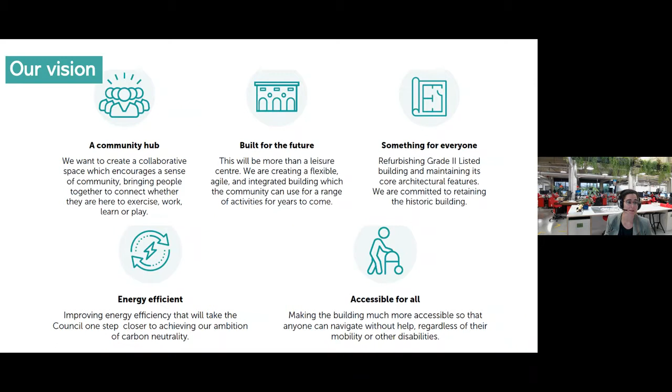In terms of the design principles for the building, we're looking to reconfigure all the existing spaces to make better use of the spaces and to be able to put new uses into the building. We want to create flexible spaces within the building, which the community can use for a wide range of uses, as well as consolidating the Marylebone Library into the building within a new family hub, as well as retaining and hugely improving and enhancing the existing leisure and changing facilities which are in the building. Next slide, please.

We've carried out a number of engagement sessions through webinars such as this in the past, and we also undertook a public survey, which was very useful, and we've been looking into the feedback from the survey and incorporating those where we can into the design of the building as it moves forward.

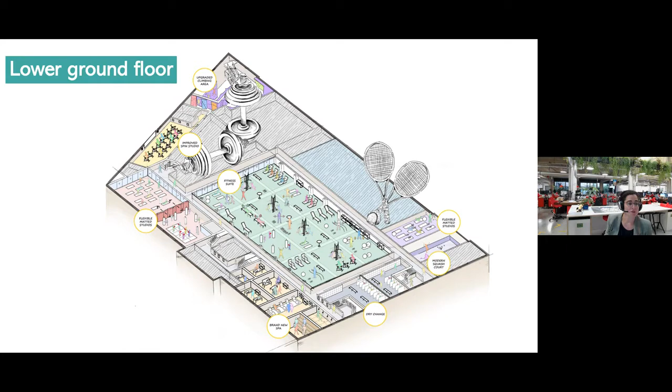So these are just some images to show some of those uses. The squash court is being enhanced, as is the existing climbing area. We will have new flexible matted studio spaces and other exercise studio spaces within this floor. The spin studio will be relocated to this floor to create a better offer. There's a fantastic new gym and fitness suite in the middle, as well as the new spa and beauty facilities, and new changing rooms to support all of these uses.

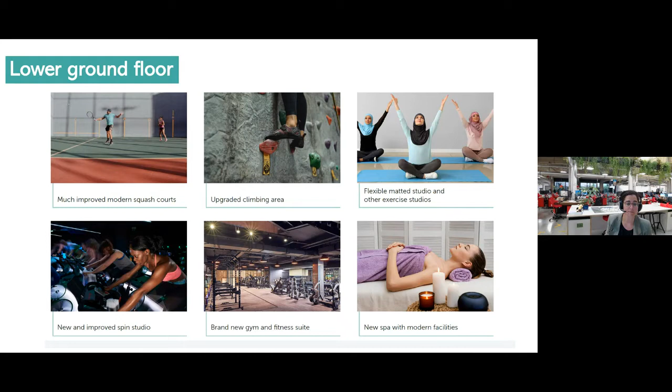On the ground floor, we're retaining and refurbishing the 5-court sports hall, as well as putting in a new community cafe on the corner, enlivening that corner next to the entrance, and the ground floor of the library, which will house more of the vibrant uses such as the children's library and some of the more learning type spaces. We also have flexible community space within the ground floor, which will be bookable for anyone in the community to use, as well as a relocated soft play and enhanced double height soft play area, and the refurbished climbing centre. We are retaining and enhancing the existing swimming pool by creating level access and bringing it into Sport England guidelines, supported by enhanced and improved wet change facilities, as well as new studio spaces.

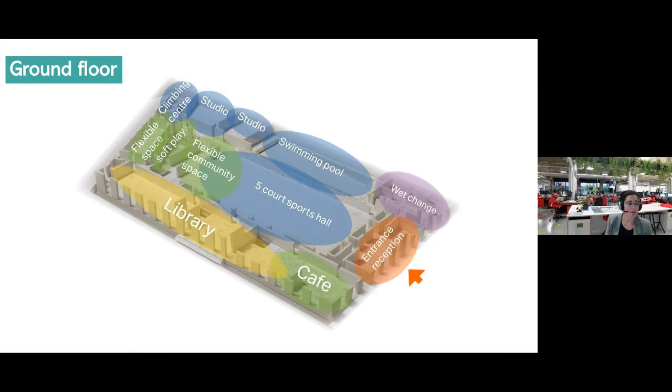So these are just some images to show the uses on the ground floor. Making the swimming pool accessible where it currently isn't step-free. Creating new flexible studio spaces that can be used for all sorts of different activities and uses. A new children's library within this floor at the heart of the family hub at the Shouldham Street end of the building, which is also next to the soft play area. Refurbishing the 5-court sports hall to bring it into modern standards, all supported by a new community cafe, improvements to the entrance hall, which we will show you a sketch of in a moment, and lots of flexible community spaces that anyone can book and use.

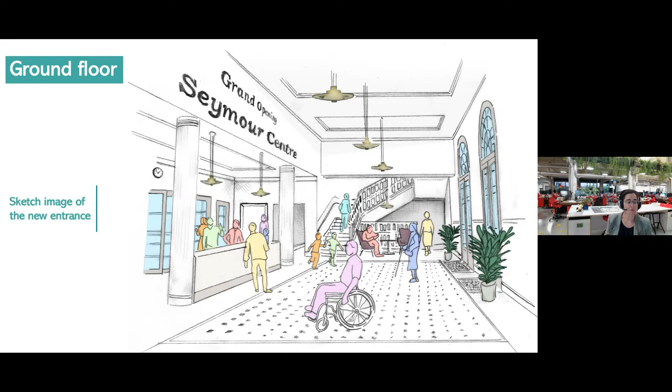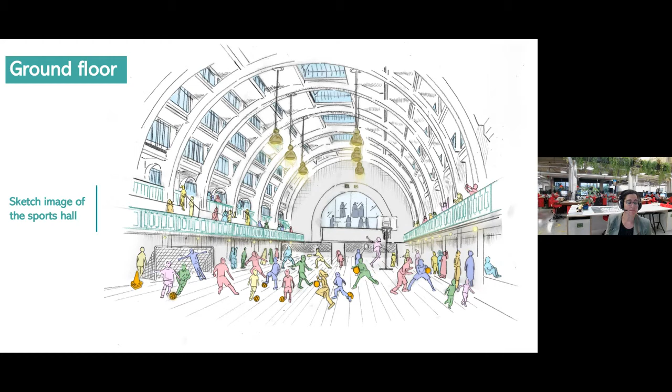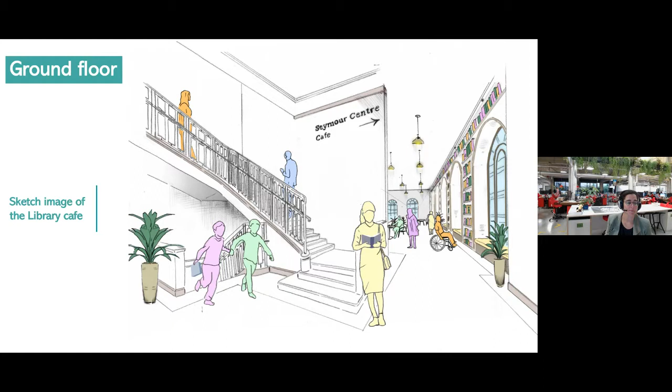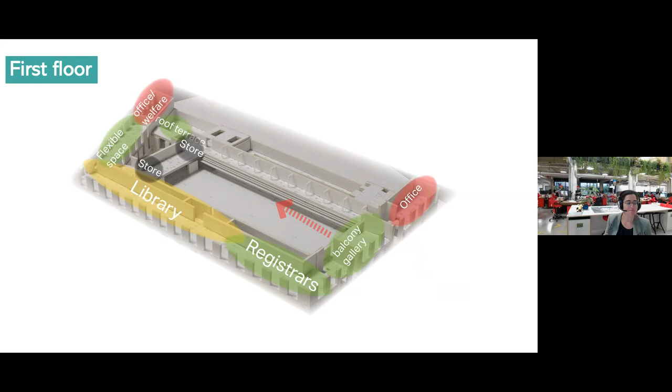Sorry, there seems to be a little delay. There, thank you very much.

So the first floor has the upper floor of the Marylebone Library, the new roof terrace, as I mentioned, the range of flexible spaces which are dotted around throughout the building, and the registrars, which will offer a new facility within the building for small weddings and ceremonies.